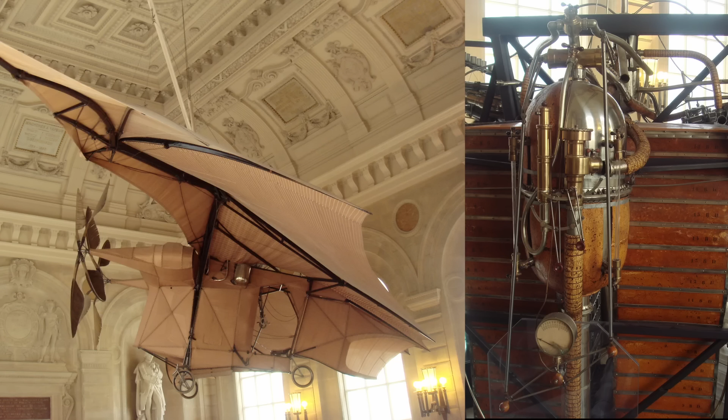Kicking off with the letter A, we have the Ader Avion III. This is such a beautiful machine, and it's so typical of those early, strange contraptions that dominate the history of the pioneering days of lighter-than-air and heavier-than-air flight. It was a steam-powered flying machine built by a Frenchman by the name of Clément Ader between 1892 and 1897.

Clément Ader was a fascinating but controversial figure. Born on the 2nd of April 1841, he was a gifted engineer and inventor. He improved on the telephone that was invented by Alexander Graham Bell. He established the first telephone network in France, and he invented this thing called the theatrophone. This was a device that allowed people to listen to live opera and theatre performances through telephone lines with stereo sound in the late 1800s.

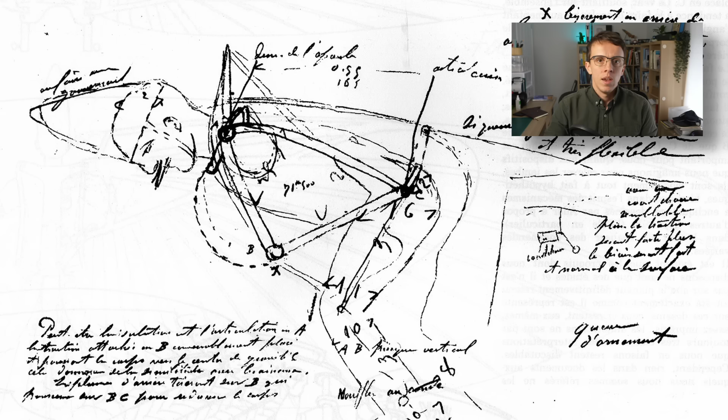It was fascinating. Unfortunately, he later developed a tendency and a reputation for sensationalist claims and revisionism. This has tarnished his reputation as one of the great inventors of his era. Ader became interested in aviation in the 1870s, and in 1882 he began constructing his first flying machine, which was eventually completed in 1890. It was called the Éole.

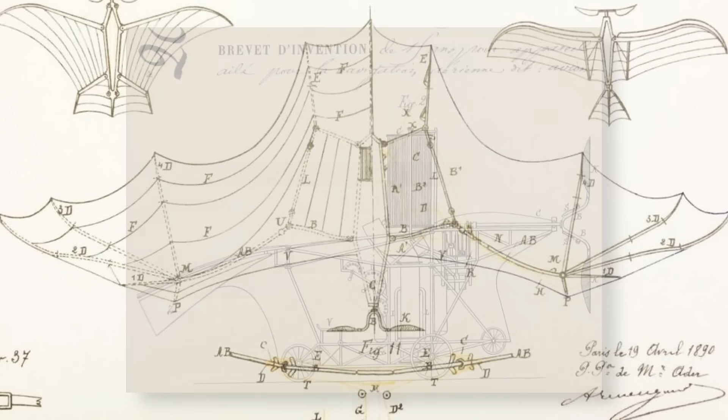Now, this thing was a beautiful example of something called mimetic design, where man-made technology mimics nature. The aircraft featured a set of bat-like monoplane wings. In this case, Ader modeled them off a fruit bat. Looking at an 1890 patent for an almost identical design, we can see that the wings were a single surface with a steep canopied curvature, and they could be folded for storage.

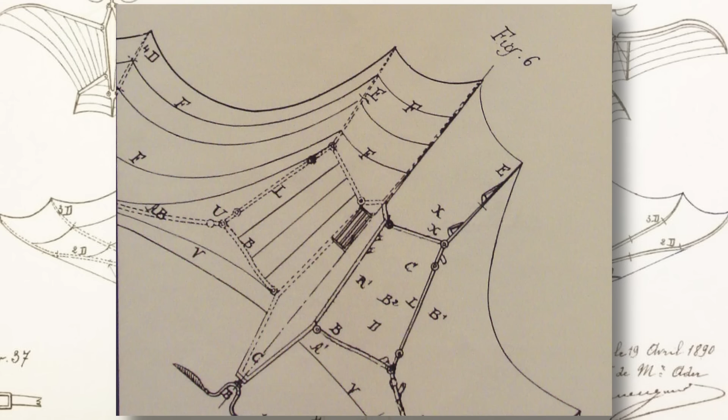That is because the skeleton of these wings was in fact a complex mechanical structure. The wings were a system of rods and joints which allowed for a multiplicity of movements, including a type of swing wing movement. The pilot could adjust the wing area, the camber, and the incidence independently using 6 hand cranks and 2 foot pedals. It was an incredibly complex, incredibly user-unfriendly, but truly beautiful piece of engineering.

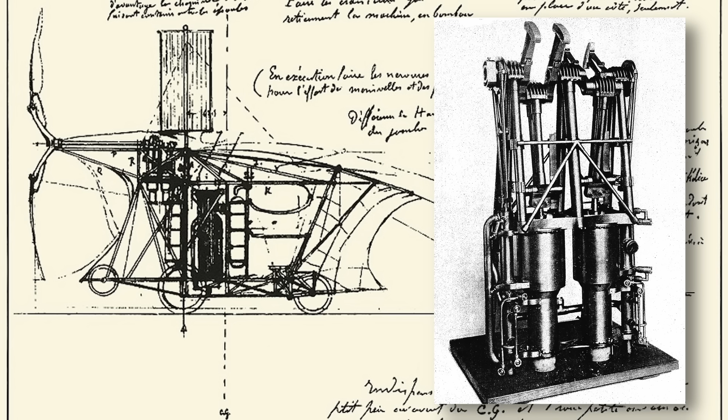It was also steam-powered. The Éole was powered by a remarkably lightweight 20 horsepower alcohol-burning compound steam engine of Ader's own design. The engine featured a vertically mounted, inverted cylinder arrangement. It used a multi-tubular boiler mounted amidships, and a prominent external condenser which was located above the fuselage to recycle the steam. The total power units for the Éole, including the engine, the boiler, and the condenser, weighed just 50 kilograms, delivering 20 horsepower at 600 RPM.

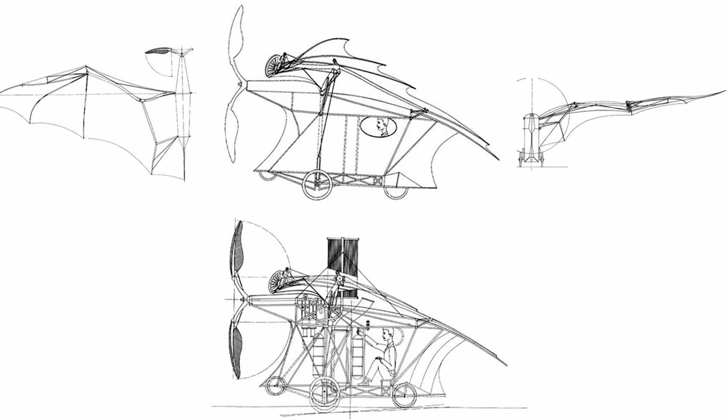This drove a single 4-blade tractor propeller, approximately 2 meters in diameter, which was mounted at the front. The blades were built out of flexible sections of bamboo and shaped to resemble the feathers you would find on a bird. The whole aircraft had a gross weight of approximately 330 kilograms, including the pilot, and it had a wingspan of 14 meters and a length of approximately 6.5 meters. The pilot sat upon a rudimentary seat in a sort of cradle underneath the wings, and the whole thing sat atop a 3-wheeled undercarriage with a 4th smaller wheel at the nose to prevent the aircraft from tipping over.

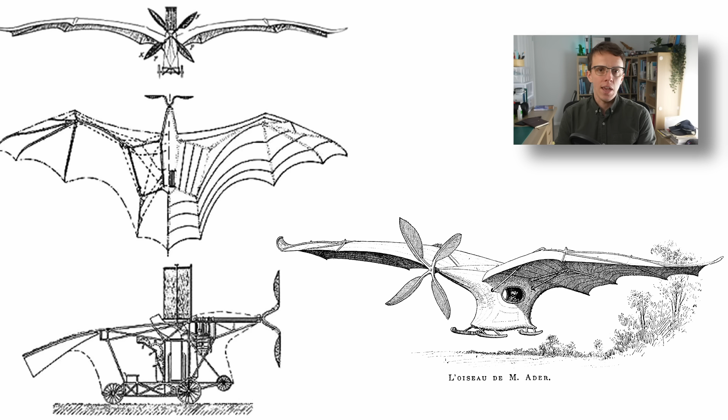Despite looking like something that came out of an early 20th century science fiction book, the Éole is somewhat significant because it has the historical distinction, depending on who you listen to, of being the first heavier-than-air machine to take off under its own power, carrying a man. On October the 9th, 1890, the Éole completed a 50-meter flight at a height of about 20 centimeters.

Now, I say flight in the loosest possible terms because there was no real control. It was essentially a glorified hop that was achieved by basic lift and aided by ground effect. And a lot of people over the years have taken great artistic license about the history of this particular event. Most sketches and drawings depicting it show the Éole achieving an altitude far greater than what it actually did. It did achieve the first powered liftoff, but it was in no way the first powered and controlled flight.

The Éole lacked pitch control, it lacked roll control, it lacked yaw control. It provided the pilots with no effective means to control the direction of flight at all, and even if it could provide some rudimentary directional control, it was damn near impossible to see out of, as the only way to observe the outside world was to look at the two round holes that were cut into the side of the compartment holding the pilot. There was no forward visibility at all.

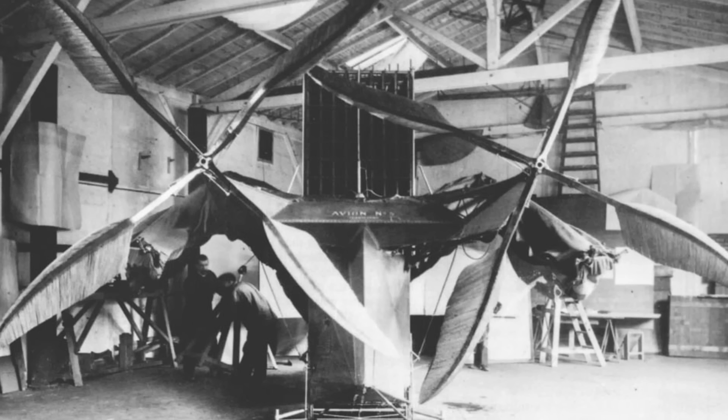However, Ader's flying machine had still managed to lift itself off the ground, and because of this, there was now official interest in his work being expressed by the French Ministry of War. In 1892, the government provided Ader with a large subsidy of 650,000 francs to further fund his development. Now, by this point, construction had already begun on a new machine called the Avion II, but it was abandoned after receiving these funds in favor of a new design called the Avion III.

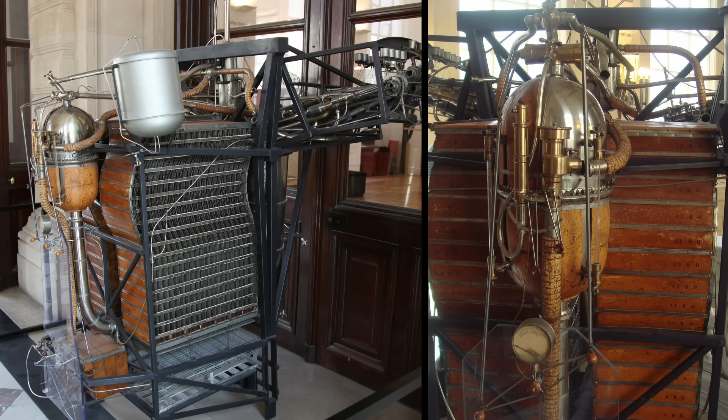Built between 1892 and 1897, it was a more advanced development of his earlier flying machine, the Éole. It was a twin-engine tractor monoplane that retained the signature bat-like wing design, but introduced significant mechanical and control improvements. It was powered by two horizontally mounted 20-horsepower compound steam engines, of a very similar design to that installed on the Éole. These were fed by a single multi-tubular alcohol-fired boiler, which provided steam at approximately 140 pounds per square inch. Like the Éole, it also featured a prominent external condenser.

This power system was now used to drive two 4-bladed air screws made out of flexible bamboo, and to save space and to allow the power plant to be installed in a compact location, the propeller arcs overlapped, with the starboard screw positioned slightly ahead of the port screw. Now, the wings on this design were a lot less complex. The various adjustable wing movements of the Éole were reduced to a single swing wing element. This was meant to shift the wings forward and backwards to adjust the center of lift relative to the center of gravity, which was meant to provide a crude form of pitch control.

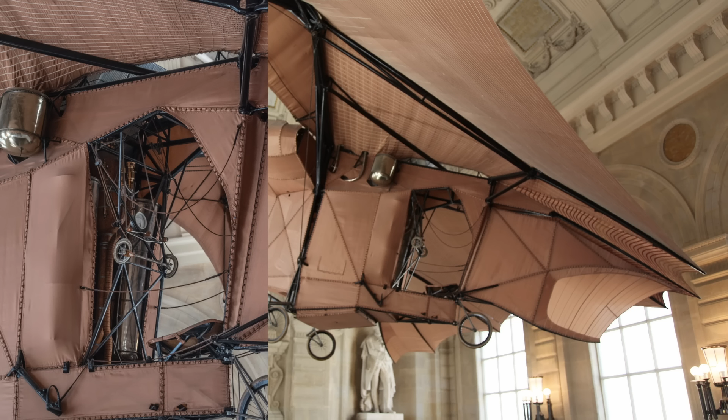It was operated by a hand crank in the cockpit, but operate is a strong word, as it required 20 to 30 full turns to effect any sort of significant change in wing position, which meant that the pitch control was hypothetical, not actually possible. But, more importantly, and with a bit more success, the Avion III actually had some level of yaw control at least. Ader included a small vertical rudder which was operated by two foot pedals. This was located beneath the wing and behind the pilot.

Supplementing this, the pilot could also make use of differential propulsion, which was achieved by varying the relative speeds of the two independent engines, which would provide more thrust to one air screw over the other, which would impart a yawing movement. So this thing is slightly more advanced than the Éole, and it appears to have a bit more control compared to the Éole, but did it ever get off the ground? Was it successful? Probably not. Due to the ministry's heavy investment, the aircraft's testing in 1897 was a formal event conducted in strict secrecy.

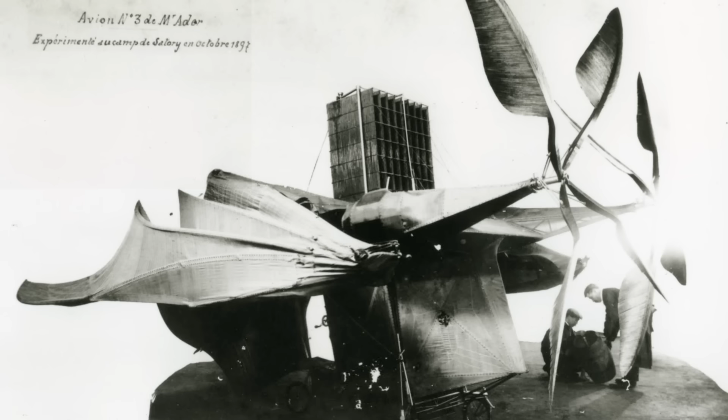Nothing more was said about it until 1906, 9 years later. Following the successful public flights that were being conducted by the Wright brothers, Ader started making claims that he had achieved the first successful flight in 1897 using the Avion III, which supposedly flew for a distance of up to 300 meters.

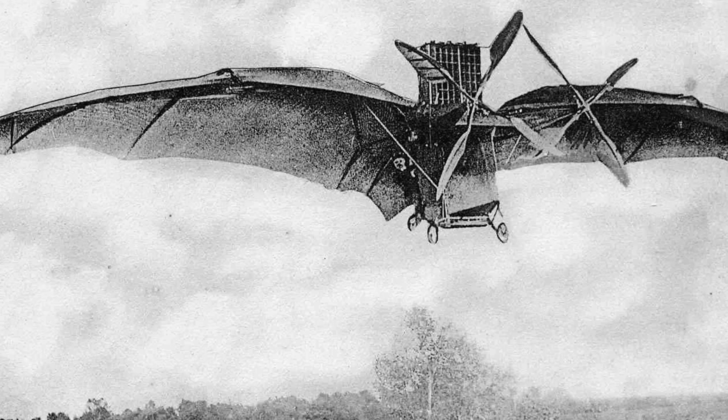Now, this could not be substantiated, as the military report of the flight was classified as a secret document. However, Clément Ader and several witnesses repeated his claim in numerous interviews, and they are featured in several French magazines from the period.

Also at around the same time, either in late 1906 or possibly early 1907, Ader also made unsubstantiated claims regarding his earlier aircraft, the Éole, asserting that it had flown a second time, covering at least 100 meters in 1891. Apparently, the claims were convincing, because in 1909, the Avion III was put on display at the first Salon Aeronautique in Paris, which became known as the Paris Aero Show.

But as it turned out, Ader's claims about the Avion III and his other claims about the Éole were a pack of lies. The official military report on the Avion III trials was finally released to the public in November of 1910. Written by General Mensier, it confirmed that the Avion III never flew. It taxied around a circular track, it attempted to take off, and it failed.

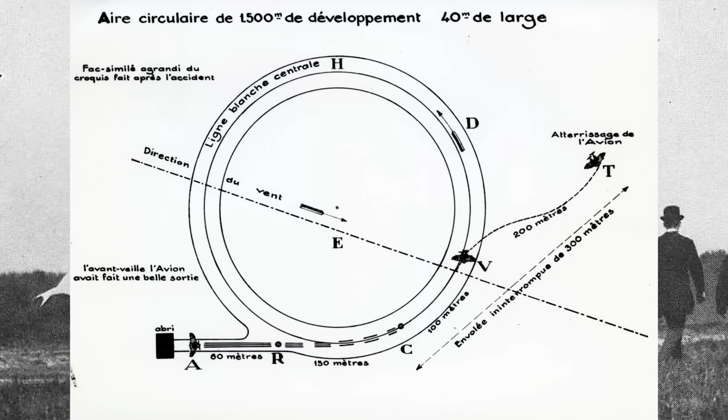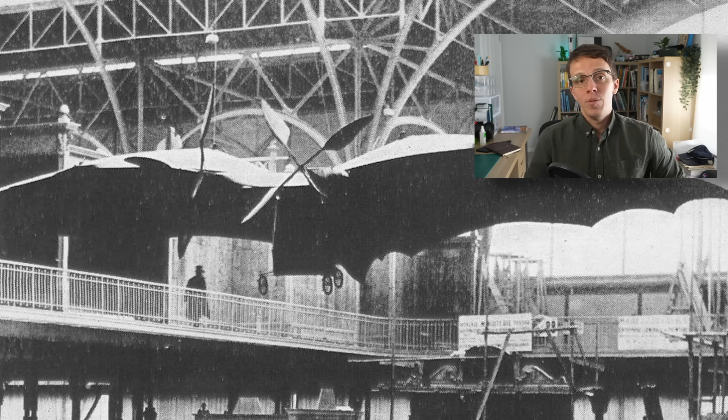Apparently, it was caught by a gust of wind and thrown off track, slightly damaged, and an attempt was never made again. Following this, the War Ministry lost interest in Ader's flying machine and his other development work, and decided to provide no more funding. That's why he was making these sensationalist claims. He was trying to drum up fresh support and secure more funding to develop another flying machine.

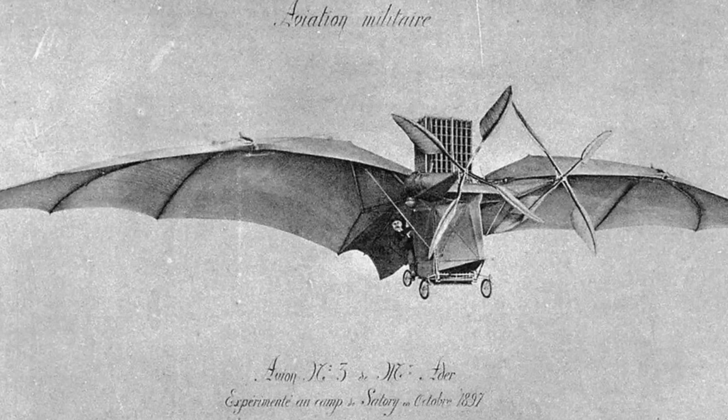The Avion III was expensive to produce, and most of it was funded by the military. If he wanted to continue, he would need new funds. Unfortunately, he would never do so. Clément Ader built no more flying machines. He was never able to get the support or raise enough funds to do so. It was not helped by the fact that he had been proven to be a barefaced liar.

However, not long before all of this came to the surface, he published an excellent book in 1909 called L'Aviation Militaire, which basically translates as Military Aviation. In this book, he made several correct predictions about the future of aerial warfare, and he anticipated the design of the fleet aircraft carrier with near prophetic accuracy.

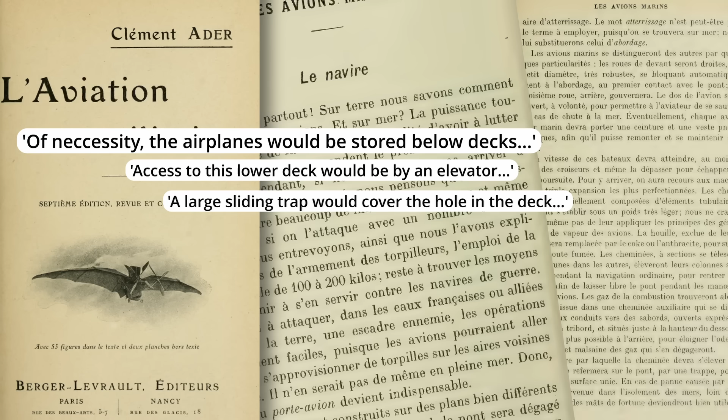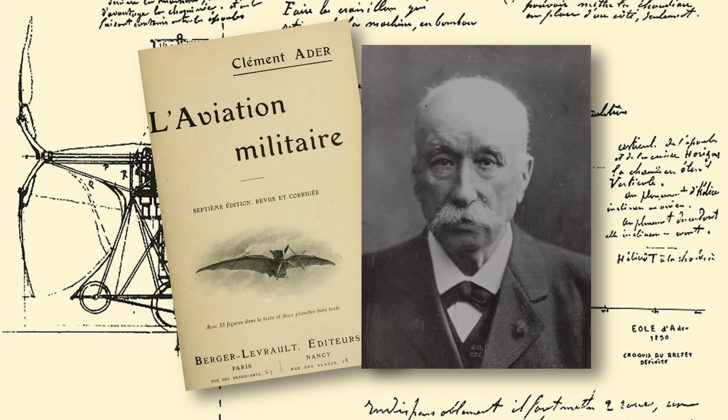He predicted the requirement for a flush deck that is clear of all obstacles. He predicted the requirements for the stowage of aircraft below decks, the use of elevators to bring the aircraft up to the flight deck, and even the technique of landing back aboard a carrier. The book is a fantastic read, so if you can get a hand on a copy of it, I highly recommend it. He was a brilliant, far-sighted man, but his ambitions had gotten the best of him, and his reputation for factual invention never properly recovered.

For one reason or another, Ader eventually destroyed much of his early works, including the Éole, but the Avion III survived. Following its trials in 1897, the Avion III became the property of the French War Ministry. After a period of time set in storage, it was eventually donated to the Museum of Arts and Crafts in Paris, where it can be found to this day. And that is a brief account of Clément Ader and his steam-powered aircraft.